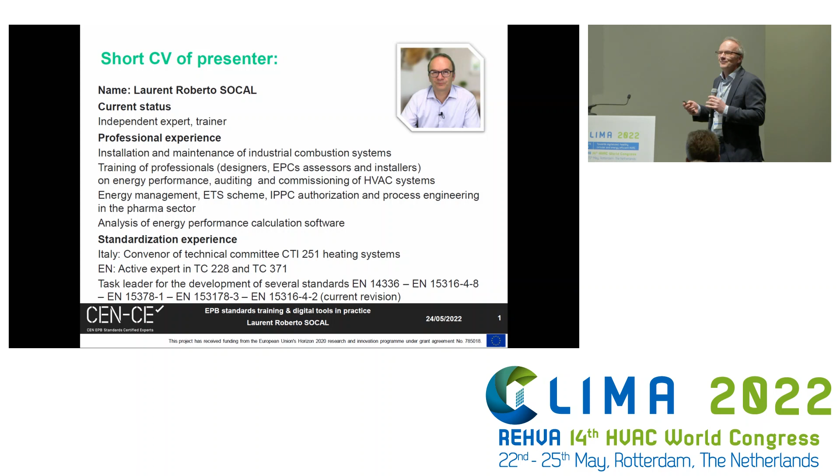This has been a good training practice. I now also have experience outside of buildings, in the pharma industry for example, a lot of things I'll let you read. I'm also a trainer, both for professionals and for low-level installers, and you have to adapt your language and provide information that is very often missing in the heating industry. We are losing a category of professionals who were really able to do something on installation. Now they are usually only spare parts changers, and that's different from being a real maintenance man.

Well, why is training needed? I think our whole life is a never-ending learning process. True training is working 3,000 hours a year with your brain connected, being curious and trying to understand what you do. That's the real training, and that's what we call experience after some time.

But why training, since we are already doing this? It's the fact that something new appears, and it's always faster and faster. So you need a place to put your experience, the basics to understand what happens so you can profit from your experience. That's why you see: a place for everything, and everything in its place. It starts with a place for everything.

You should know the basics. We are very keen on this in the CEN-CE scheme: first, start with the basics, the fundamentals. Otherwise there's no chance to understand how it was standardized. So this is the first step, and this training shall prepare the right place. More or less, training is something like a spark which should ignite a process that it's your task, in your everyday life, to complete.

We have two new challenges, for example. One is at a high level, one is about the technology. We are slowly shifting from boilers to heat pumps - that's happening. So that causes a problem, because we've been used for decades to using boilers. So you have consolidated habits in design, installation, use, maintenance and so on. Now we have a completely different concept.

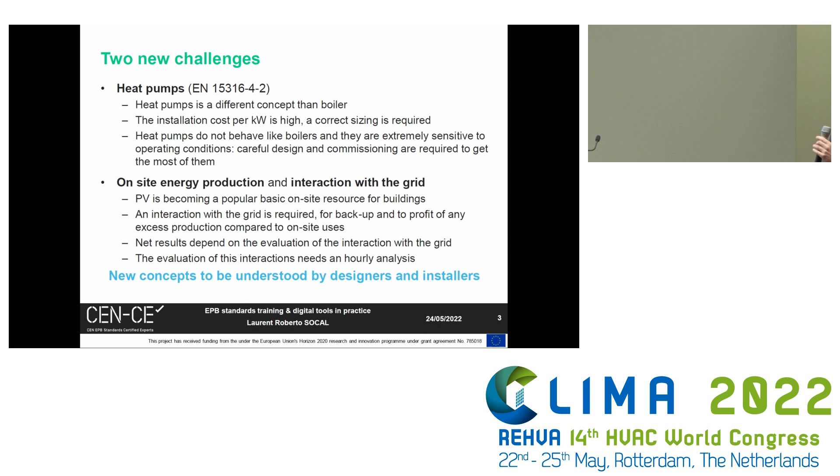This depends on hydraulic circuits, which you have to recognize and take into account - that's one of the issues. The second issue is that in the past we only had buildings using energy: delivered energy, multiply by the weighting factor, quite simple and straightforward. Now we are exporting energy, and when you export energy and interact with the grid, this causes new concerns. Here again, you have to know the basics very well, otherwise there are things that are game-changing which can be ignored. We will see this with some examples from the training.

So PV is becoming a popular basic on-site resource for buildings. We speak of renewables, and then you end up with PV and some thermal solar, and probably something else for the moment - probably something more in the future. So interaction with the grid is required, and the net result depends on the evaluation of that interaction with the grid. We have to understand this correctly - it's a new concept for designers and installers.

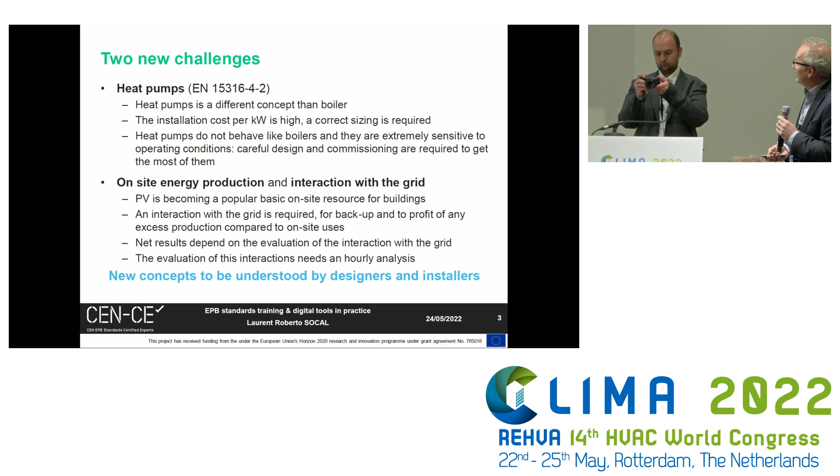Why standards, and why EN standards? We've heard the presentation from Pau before, and we know that figures are appearing in the EPBD directive. If you put figures, then you need a standardized and traceable calculation method, because if you want to put a limit, you need a meter so you can measure your building, and the regulation will put a red line - this is the limit. But if you change the calculation behind it, you actually change the regulation. So you need a precise reference.

And you need an hourly methodology. Why? Because the interaction with the grid is based on an hourly process. Monthly, you can say nearly nothing, so you have to go through hourly calculations. You need an electricity balance for the hourly interaction. This is covered by EN ISO 52000-1, the overarching standard.

The description of the building and the system should not change compared to our habits in the past, because if you change the description, then it's more work to learn and so on. So if you look at the EN standard and mandate M480, there are fully spelled-out equations - fully traceable - an hourly method, minimal updates to the description of the building envelope and technical system, and a common EU frame. The alternative is 30 different methods. That's why it was interesting to start directly with the EN standard - we need a common meter.

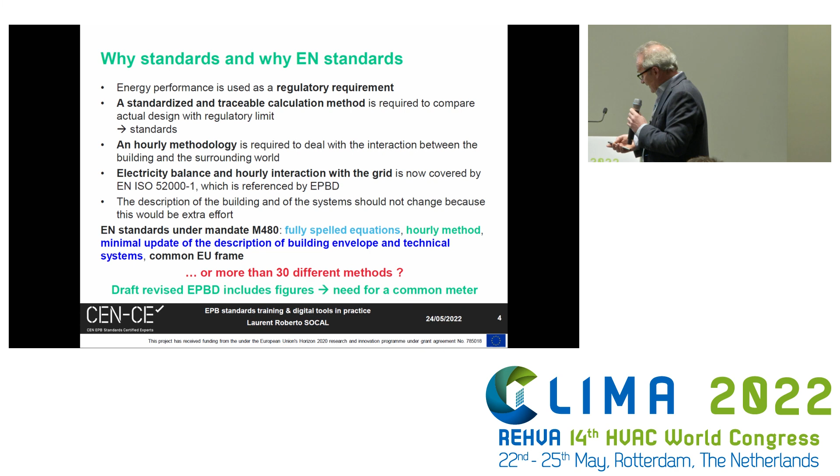So what about the methodology? Of course, it's not just a detailing equation, I already told you that. If you want to understand and master a technology, first you need to understand the basics. After that, you can understand how it was standardized, and that's why each of our modules start with the basics.

Then you have to test it to have a minimal feeling of what the calculation does, so you need some training tool to do calculations. If you just present a line of equations, I don't think the result will be very productive. So you need tools to do minimum testing on your own before going with professional software, and simplified calculation for a test profile.

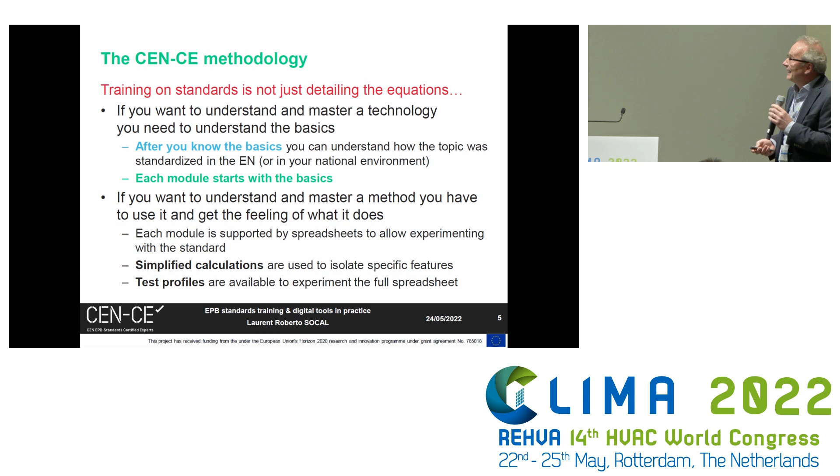We'll see this as an example, and usually I use this example to illustrate what I mean. In the automation industry, you speak about safety integrity level. When you want to be sure it will work, think about the traffic light. If there's a mistake in the command of the traffic lights, I think the result will be a disaster.

So how do you proceed in practice when you need safety? You could say, okay, I will put two PLCs in parallel. That's nice, but if you have a software mistake, you will replicate the same mistake on both machines. So what's the better approach? Use two different PLCs with two different programmers, and if both go to the same result, it's very likely that they're both correct. That's one of the principles.

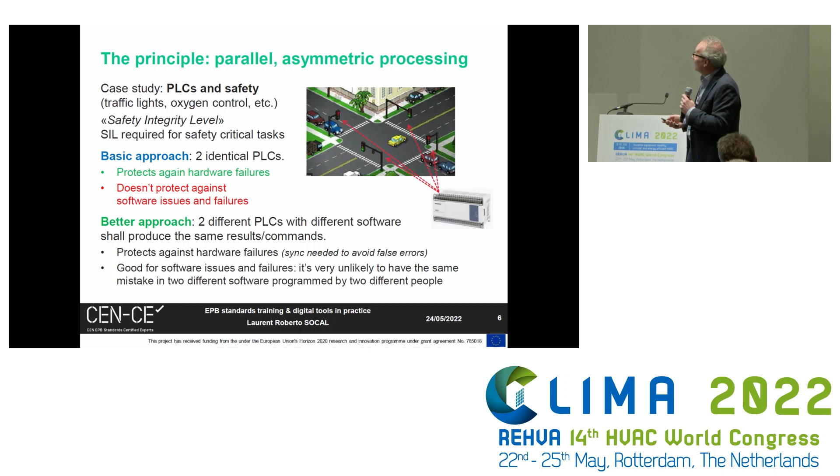It's called parallel asymmetric processing. What does this mean for us? It means that when you are a designer, installer, or an assessor, you have processor 1, which is a software, your calculation software, and this strictly obeys the input. It has no fantasy, no initiative, no awareness.

You can put any value, it will process it, and damn fast. It can handle tons of details, and doesn't learn from experience - not yet, because with artificial intelligence, we don't know. Probably it will learn in the near future.

And then on the other side, you have processor number 2, which is your brain. It evaluates the input, it has initiative, it can invent new solutions, should be in control of fundamentals, is damn slow in calculation, but can handle a few numbers and shall be trained and learns from experience. So if both go to the same result, we are safe that it was a good process. That's why fundamentals are very important.

So how is our training organized? Every time you have a training, you have an introduction, of course, fundamentals, and then the calculation method, which is detailed, the output data, the required input, classified by what depends on product, what depends on operation, and the calculation procedure and application example, straightforward.

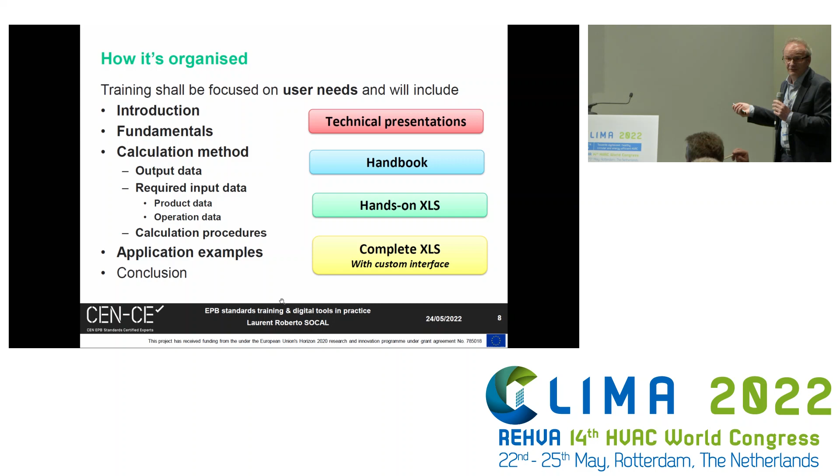What are the tools? Of course, technical presentation. Then we have handbooks - a resume of the standard with the chain of equations for a quick reference. But then you have hands-on XLS, meaning simplified Excels that allow simple testing. And then you have the complete XLS with the custom interface. This is the added value, an Excel for each module with a clear interface. We will see some details to get the flavor.

So fundamentals, of course, description of the physics and the important phenomena of the technology. The expected result is that you understand. I will skip because I already told you this several times.

Why is it so? Because 52000 has to handle an hourly balance, hourly weighting factors, evaluation of exported energy, possible inclusion of non-EPB uses, need for partial performance indicators by building unit, by service, by zone, and scalability to other levels, like energy communities. If you combine all these requirements, of course we'll end up with something complicated, because reality is complicated.

Sometimes you have a complaint: why do we have complicated standards? If you don't want complicated standards, just build simple buildings. But that's not what we want, so we are obliged to go through it.

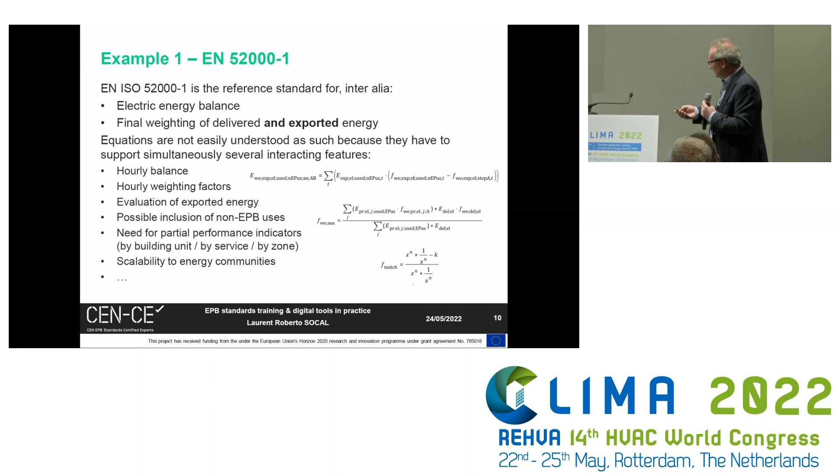So how to handle this? Start with the fundamentals. And this is an example about exported energy.

Okay, so it's a simple picture. Now we can understand much easier. It's easier to understand, as is a typical case in the past. You need 1 kilowatt-hour of electricity to light up your lamp. It comes from here, because the real impact is the impact on the environment.

In case of energy, the impact is that you're using a non-renewable source. And to get 1 kilowatt-hour here, this is calculated on site, but you have to represent what happens outside your buildings. So you have a primary energy factor, but it could be an emission factor, it could be a cost factor. That's called weighting in general, because you have different ways of weighting the delivered energy.

We all know here it's 1 kilowatt-hour, but what's the effect of this kilowatt-hour? Energy, emission, economics, and the result is not the same. And that's another thing that people have to learn. Class A means something, not everything. And you might have huge surprises.

So until now, it's quite straightforward, 2.5. That's clear, non-renewable, maybe 2, maybe 1 in your Norway. Lucky, all hydropower. So of course it's different. And that's natural that you have differences, but you have to understand what you are representing.

Then you can complicate things with exchanges between grids. It makes things even more complicated. But the basics is you are representing what happens outside.

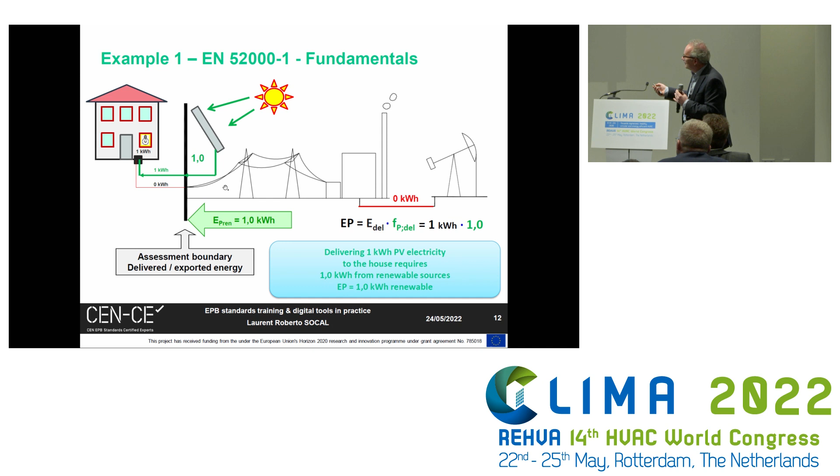And now we can make one step forward, using PV now. Quite simple again, I still have only one source. I weight this. We can argue about this value of 1 for 1 kilowatt-hour renewable as primary energy. Of course, it will be 0 for cost, running cost, not installation cost, and so on. Until now, it's clear. But now, that's the question.

You turn the light off. Your PV panel is running, capturing electricity, or capturing solar radiation, transforming it into electricity, but you don't use it. So you export it. Now, what are you doing here?

Here you have two solutions. Either you think, okay, I'm exporting 1 kilowatt-hour, I'm saving the generation of 2.5, or the use of 2.5 kilowatt-hours of non-renewable, because I already input into the grid 1 kilowatt-hour. So you say, it's worth minus 2.5 primary energy.

But you could also say, well, I'm sending into the grid 1 kilowatt-hour of renewable energy, which will be used by the next building in my community. So which is the right one? Well, there's no right or wrong. It depends. If you are doing some accounting, there are costs and revenue and what you invoice, the value, and the difference is your benefit. You just need to agree.

And if you go further, you could ask the question, well, I want to calculate the impact of providing comfort to my building. Okay, this 1 kilowatt-hour, is it providing comfort to my building? That's something you could think about to select which is the right solution.

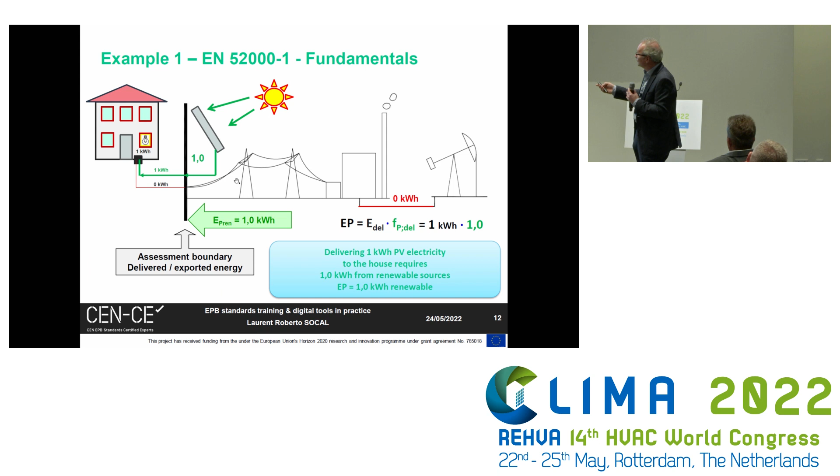And this applies to all the possible weightings, because you can do the same for the weighting about CO2 emission, you can do the same for the cost, for example, and you can have a different cost for import and export. So you see, even this choice, which is the right approach? Is this the cost? This is the example of the cost. This is how much it costed to provide that kilowatt hour that I exported. And this is the benefit.

So from this, you can see, and this is one of the main points, for example, now we have the definition of zero emission buildings, how do we account for exported energy? And if you change this consideration, this is a game changer, totally a game changer. And this we have to understand clearly.

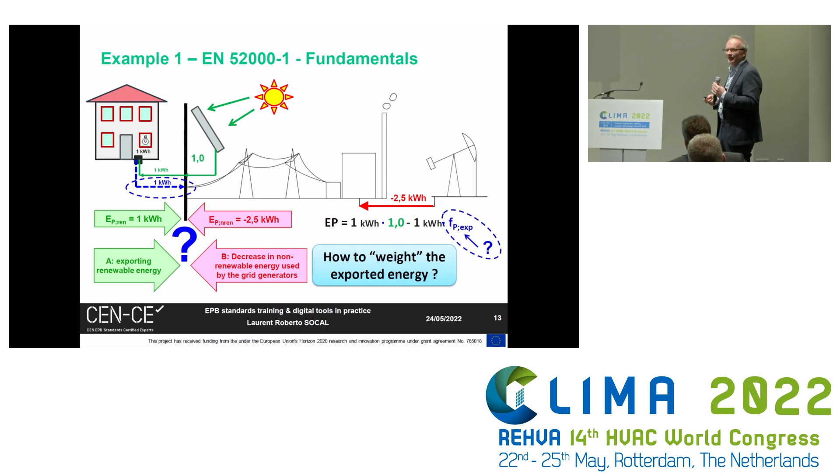And then if we understand this, when you do the selection about the parameters, then we can understand what we are doing and if the results make sense when we see the results, the last figure at the end of the calculation of our software. Okay, that was an example.

But now you need some training because you want to practice. So you can do this. You take this simplified spreadsheet where you see a heat pump, just a PV panel. You can click on the buttons.

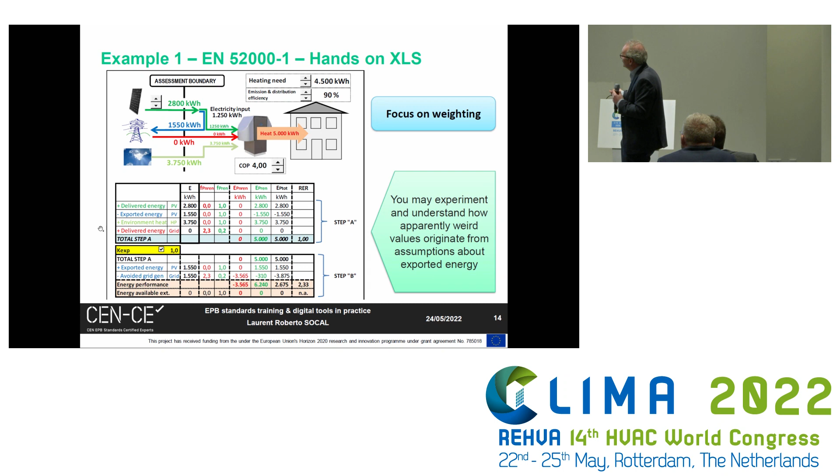So you increase the production of PV electricity, and you can observe the balance here. First, you do the balance by taking into account only the costs, which is called step A, or you can put into the game the exported energy. By clicking here, you decide 0 or 1, and you can see your result.

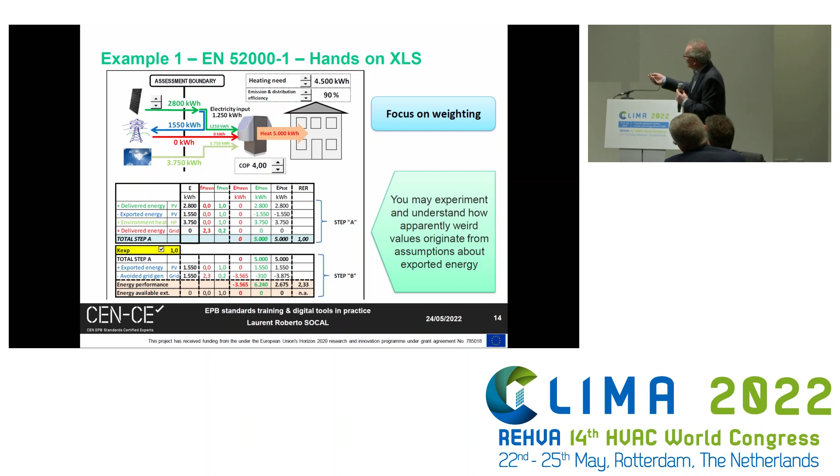If you slowly proceed from 0 to a higher value, you can see what happens with some weird values, negative values for primary energy, negative value for the renewable energy ratio. Why is that? But if you practice here, you can understand the meaning. It has a meaning, it's not weird. It's the message that comes from this kind of calculation, which has a physical meaning in any case. But if you see this simplified, it's quite easier than with the total sheet.

Okay, and the same, for example, what does time mismatch mean? Okay, you have your lighting, I put a PV, so I have my lighting. Yes, sorry, but you need this during the night, and there's no sun, probably.

Well, in the offices you need lighting in the day. We need lighting even now here because we have no windows sometimes. But okay, that's something you must evaluate. Usually one thinks, okay, lighting, that's in the night, why PV and compensate? So that's why this is typically on an hourly basis, if you want to evaluate and decide if I'm allowed to compensate or not.

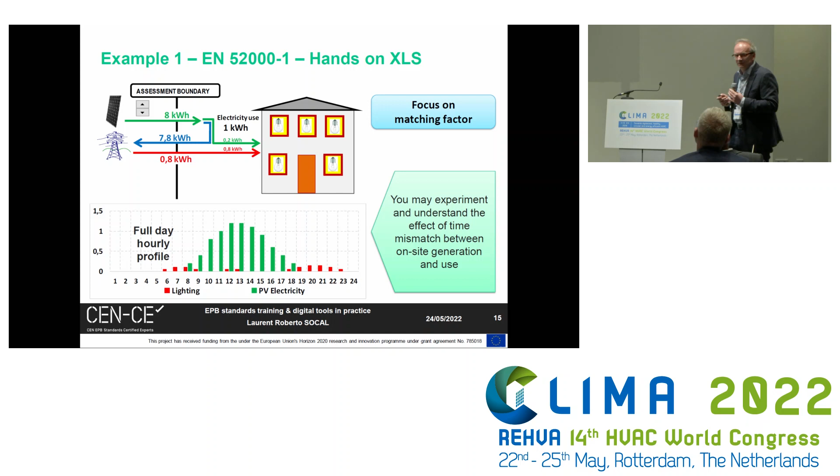This is also a consequence of the choice we illustrated before. So you can see how much consideration we can do even on simple examples to give you insight into this important standard. And if you want the whole picture, of course, you have the full XLS, and you have also some interfaces.

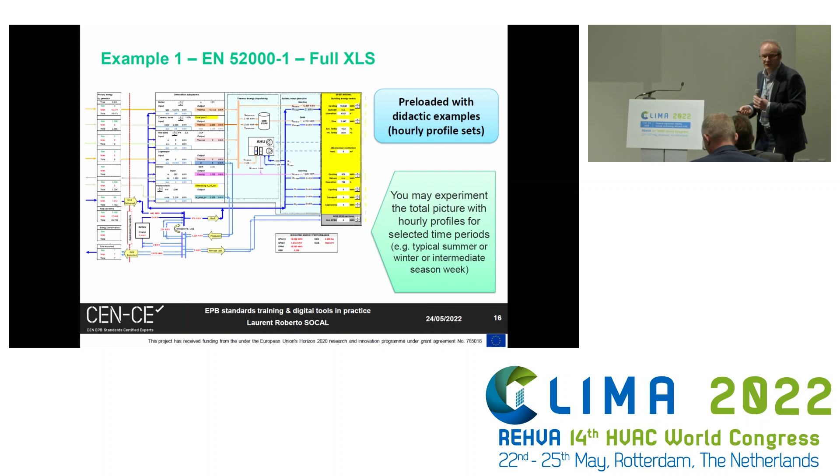It means you have an interface explaining, oh, you did this calculation, how much were the needs that you took into consideration, what was the configuration more or less, and which are the energy flows, which is the electricity balance, and you have all the figures. You can see the total picture for a sample calculation. So you also have interfaces, which is an added value to the bare Excel for the calculation.

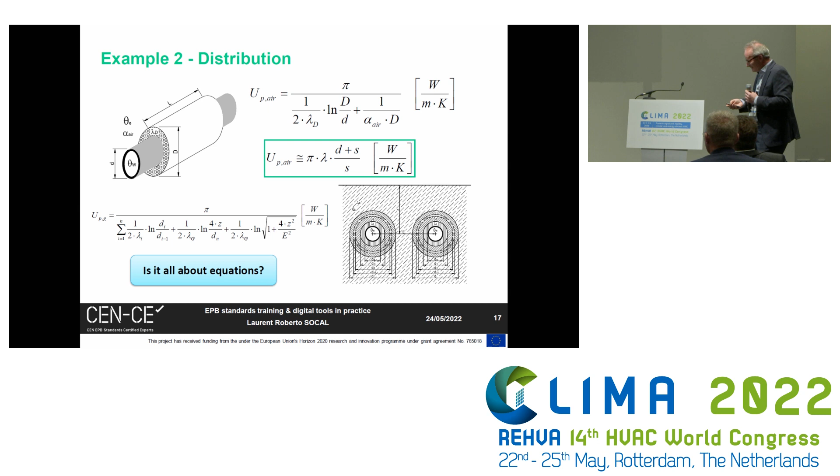Just another example, very quick, about distribution. And again, these are quite interesting equations that probably we all have seen in our books. And I don't know if we are using this every day, even if you are a designer. But what is interesting is not only detailing the equation, it's really understanding what happens after that. If you make just a sample Excel and do a sample calculation once in your life, probably during a training, and they ask you, okay, please calculate the linear transmittance as a function of the insulation thickness.

And you will discover that you can insulate as much as you want, there is a limit. And you get always to the same limit. So no chance to say, oh, I have losses in my network, I will insulate. I must be very careful because the network is losing energy, and whatever your idea, it loses more. If you're lucky, it's recovered.

Otherwise, it's a mess. And I think the experience of very hot corridors in summer because there is the hot water line, or if you compare the needs for hot water and the losses with the distribution, it will be quite interesting. But this is just by understanding the basics, this has also a lot of side effects which are independent of just learning a standard.

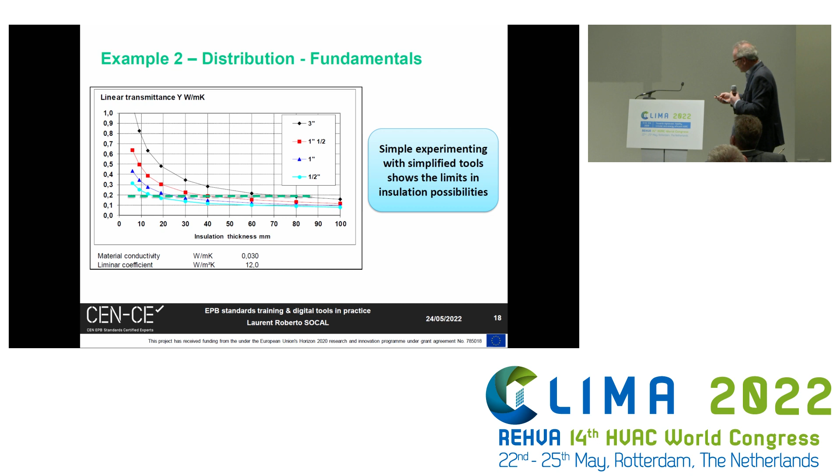A standard is just one way to represent something in a common way so that we can understand and compare, for example, for regulatory purpose. But we have to understand what's behind, otherwise it's just blind calculation. So this is another thing which is very important.

That's very instructive every time you have a teaching. Start always with a question: what's a heat pump? And listen to your attendants. I think at the very beginning when we started the training about energy certificates, my first question was always, what is energy? So you want to speak about energy? Okay, what's energy? Can you tell me an example?

How could you represent 1 joule, for example? What's something that happens and involves 1 joule? So that we understand if you really know what you're doing. Because training means that at the end, when you hear a word, something lightens up in your brain and says, that's it, I have an example, I have the feeling of what happens. So, and you could also ask some other questions.

And that's very instructive. That's a technique also for teaching. You must provoke emotions. They feel, oh, I don't know. That's why they will remember.

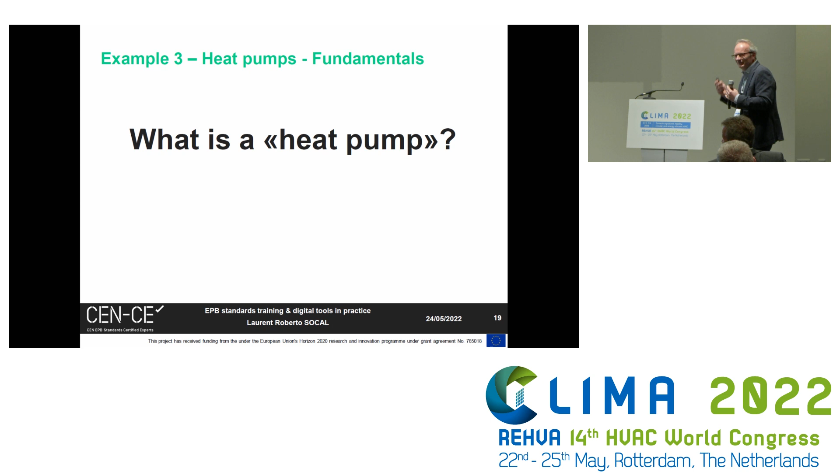So, heat pump fundamentals. I will not annoy you too much about heat pumps because I think every one of you knows them very well. It's a very interesting machine, very efficient, but extremely sensitive to operating conditions. So if you don't design correctly, if you don't commission your system, there's no chance.

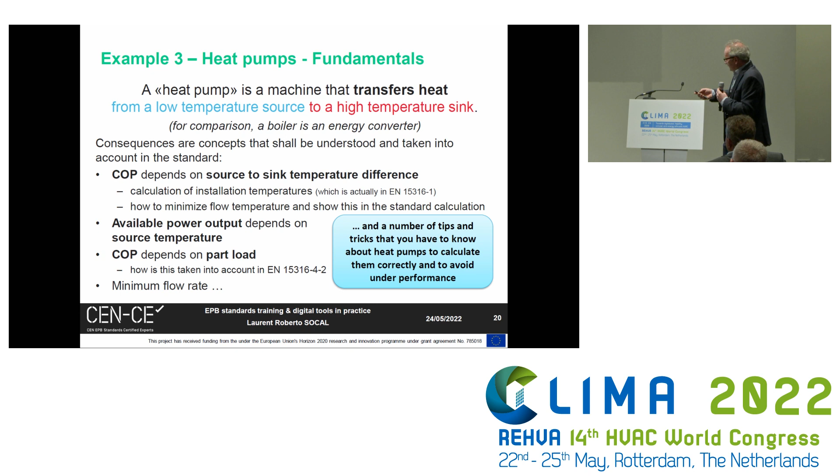So you have to understand this. And in the standards, of course, you have to know where you deal with operating temperatures. So this is the example of why I'm speaking about heat pumps, because now we will have a flavor of what the complete Excel supporting one of these trainings looks like.

So if you have a complete Excel about heat pumps, here you have the list of elements that you have in each Excel. You have an input interface, so you present the data in a way that you can understand it.

So first you have, for example, this is a case of qualitative options. What is your source? External air. Are you using a default calculation or another calculation model? What's the sink? Technical water, installation water. What's the technology? Electric, absorption.

So you have a number of choices, and that's what makes the calculation of heat pumps difficult, because you have a lot of possible choices. You have to learn how to react to all these kinds of technologies. So that's the input interface for qualitative data, and then you have an interface for quantitative data.

I mean, for example, the standard conditions, COP, and so on. So then you have base profiles - I will explain what that is - an input series, method input. We'll go through this one very quickly.

So base profiles - you want to experiment hourly? Well, you need some preloaded data, so you have base profiles. Here you have, for example, the hourly data, but you can select from a test profile. You select here and you load the data, so you have preloaded examples supporting your teaching.

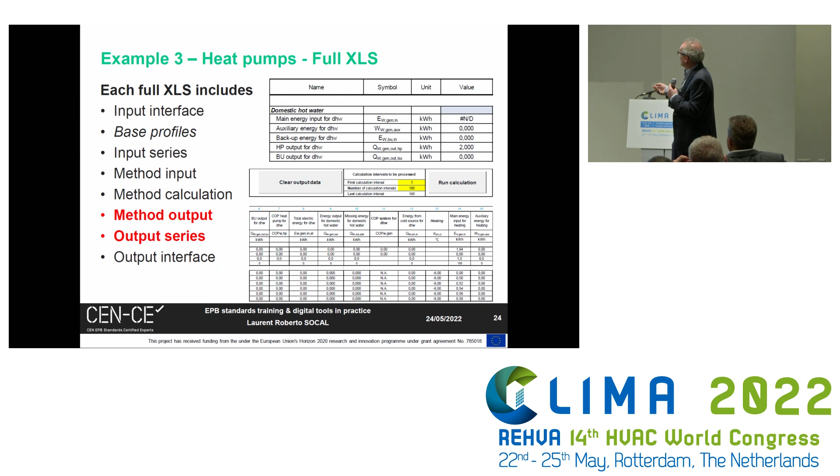And of course, the method outputs - the list of all the outputs. And that's interesting also, having an output interface.

This is an example of your test profile. It's a test profile which stresses a heat pump with an increasing load, and you can see how much heat is provided by the heat pump. And you see the COP, which is, of course, falling at zero because of intermittent operation, going to a peak, and then going here.

Here you are introducing some backup energy, so your COP for the system drops because you're using energy. So sometimes it's not interesting to have the whole year, but to use a stress profile - how does my system react progressively to a changing load? That's very instructive. You can see here, this is then repeated for different source and sink temperatures.

So you can see the difference when the source temperature increases. I can fulfill the whole load because with high air temperature, I have much more power output available, so I can fulfill the whole load. You see the effect for two different flow temperatures.

Some statistics, for example my COP, what happens. Here you also have, for example, what happens for the distribution of the load factor depending on the outdoor temperature. We spoke about design. This is the result of an energy performance calculation.

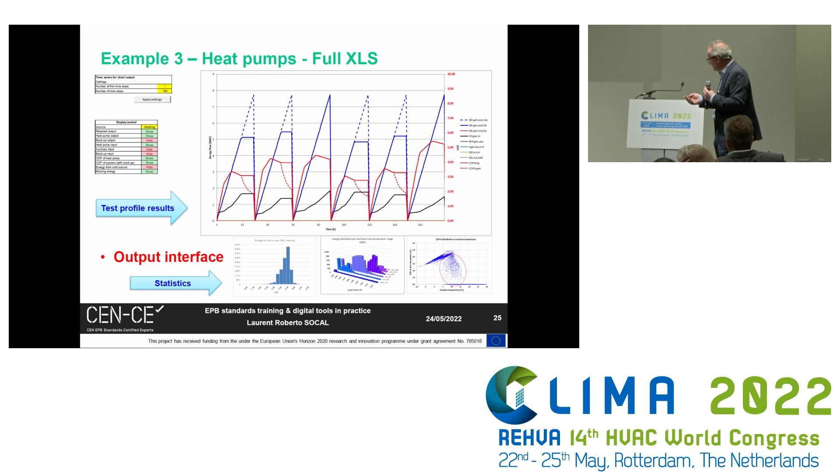There is valuable information, extremely valuable information for the design process from the energy performance calculations. This is also important to know, this is especially for designers. From the energy performance standard, you can extract a lot of information for the design. And for heat pumps, that's critical, because oversizing costs money and compromises and deteriorates your performance.

So, conclusions. I'm ending by annoying you with my presentation. Of course, my wine is the best on the market, of course.

So in the scheme, you have all the technical features and dedicated supporting tools to provide effective training. You've seen an example of the supporting tools provided, to allow you some experience directly in the training. It's based on a modern IT platform, so you can blend self-training and interactive sessions, as in the example of today.

I explained something, and I think it was interesting if it's done in person. It's not that easy to do this online through a video. You can try, but it's not so effective. So you have to blend it and have interaction for your questions and so on.

So the main obstacles are practical barriers. I think Johann already spoke about this, and this is sometimes really a concern. National and regional training schemes are also linked to the compulsory qualification of design people, and this is sometimes a barrier we have to integrate if we want to go through. And of course, national calculation methods. But if you understood the fundamentals, I guess you can understand how the EN standard handles your process, and how your national standard does the same, if you really understood the basics.

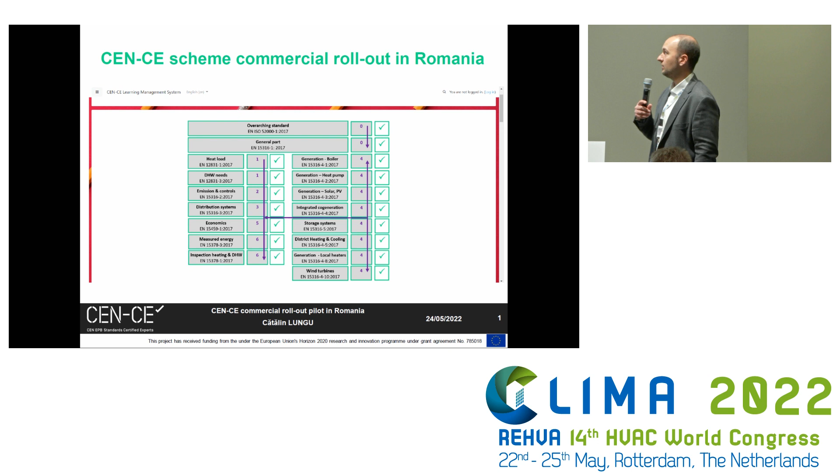Basically, this platform serves all the processes that need to happen, because there's always a first step where you need to transfer the knowledge. Laurent, for example, is a master, the so-called master trainer. Then we need to transfer this knowledge, and this is what we are doing currently in Romania. We are transferring the knowledge to the national trainers, so they become certified trainers. That's step number one, the transfer of knowledge.

As of that moment, the central scheme operator has a licensing agreement with the national training operator, and the standards need to be translated into national language, as I already said. Basically, as of that moment, the steering wheel is in the national training operator's hands to roll out the scheme, to do marketing on it, and showcase the utility. Everything can happen either physically or virtually. As I said, we have the platform if there's a need or a preference for some people to join remotely.

I can illustrate what we did in Romania. We already started last year. It was the pilot country, so it usually takes longer the first time you do it. We organized either live sessions, which we recorded and then uploaded in the learning management system to have something constant to check when you need it. Or we had pre-recorded sessions and we only organized the interaction part.

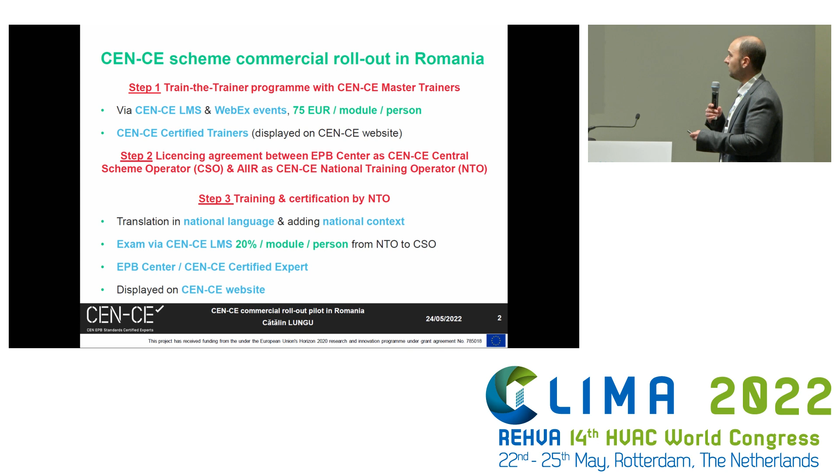And in parallel, we are trying to build value. So in Romania, what we did, we contacted the national standards body, because you need the standards, you need the tools, and the training. This is like the sequence, but you need them all.

So we already discussed and are close to signing an agreement with the national standards body to provide access via the LMS to view the set of EPB standards in national language, because sometimes you want to go deeper on a certain vertical, and maybe you cannot reach Laurent so easily. He might be giving a training or participating in a workshop at CLIMA, but you always have the standards as a reference. This basically streamlines the access to the standards.

In some countries, you already have this subscription-based access to the standards. But in other countries, you can only buy them, either electronic or hard copy. And sometimes, if you want the full set, it can get quite high, the price. So we imagine this - I mean, there are so many platforms today, I will not name any of them. But you know that at a very low cost, you could get access and be empowered. And it should be attached to the training.

And we are thinking of means to make it even more valuable, but this is what I can share for the time being, something concrete that will happen in Romania.

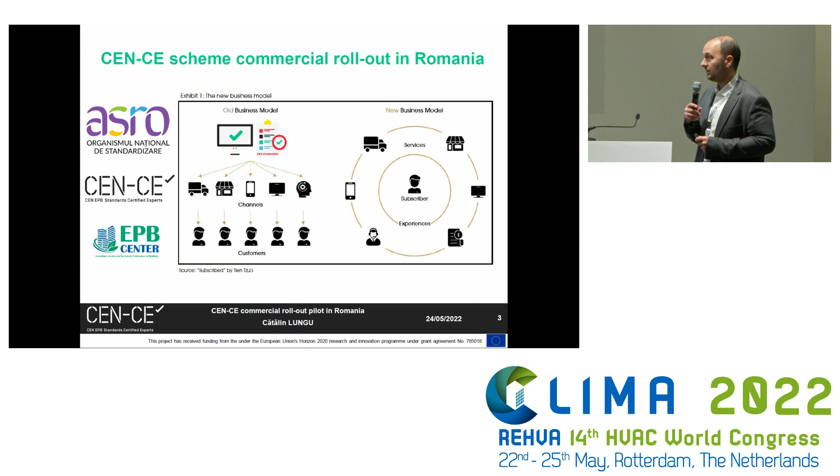So that was it in a nutshell. I think we are 10 minutes behind schedule, so I will stop talking and give the microphones to both Laurent and Johann. The only other thing I want to say is that we covered 4 EU member states, and at REHVA we were at EU level, so we didn't cover any particular national language.

But we have already translated the standards that I put earlier on the screen into French, and Francis, you know who did it, as well as into Croatian, Slovakian, and Italian.

So we haven't yet defined at EPB Center the priority, and that's why we also want to have a discussion today with you guys. If you want to ask certain questions about the process, or if you would just like to share the experience in your countries, and if you think this could fly, and how you think it could fly, maybe we could start with these countries, especially those present here today, to share your opinion.

But before I do that, I'm really honored to have today in the room with us our keynote speaker of the day, Pau Garcia Audi, and at the same time the ASHRAE president, Mick Schwedler. Thank you very much for having joined us.